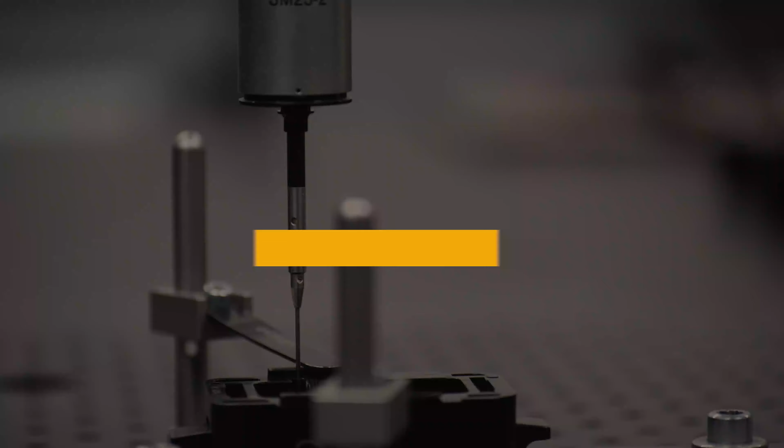We're taking our customers' drawings and designs and concepts, and we're building them into reality, into a production system that we deliver next door.

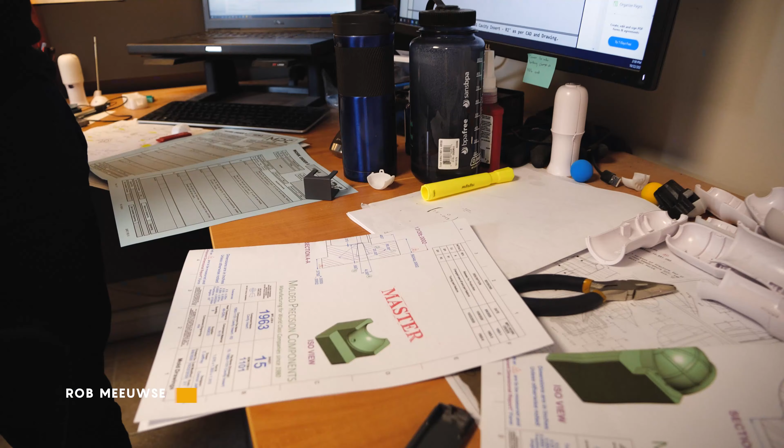Is there anything critical that you guys need or need to update on as far as timing goes?

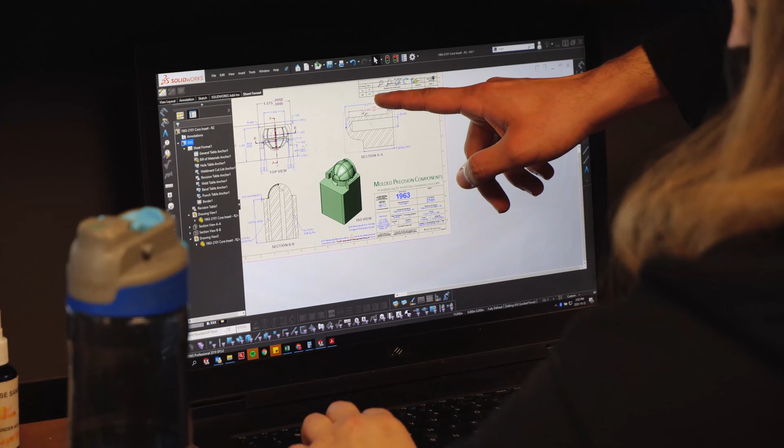Our program manager is Sam Cooney, who is responsible for being our main liaison between everyone at MPC and our customer. They take care of managing the timelines, all the money in and out for what happens with the program. Our current project engineers are Kasai Hassoun and Shane Comella. They're responsible for dealing with all technical things on the project. They're the ones who have to take true ownership of it, every aspect: the design of the tool, the tuning of the parts, making sure that we hit our dates on our timeline.

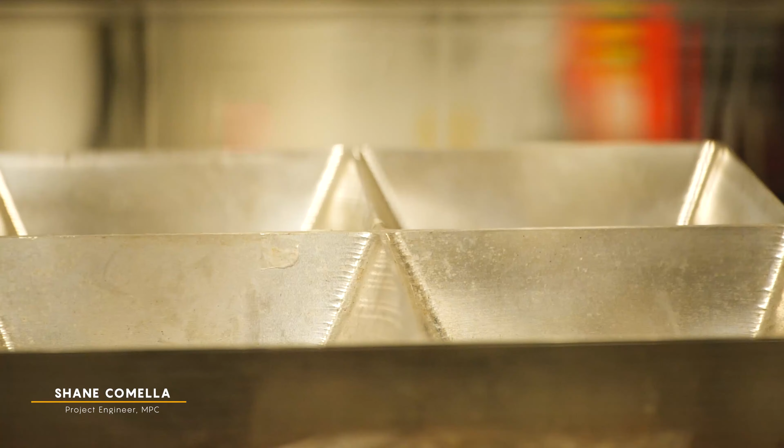I spend so much time looking at paper prints of the part or the 3D CAD model, but there's just something about seeing the plastic go in and the mold open and then seeing this physical part in your hand. It's really exciting. It makes me feel like a giant kid.

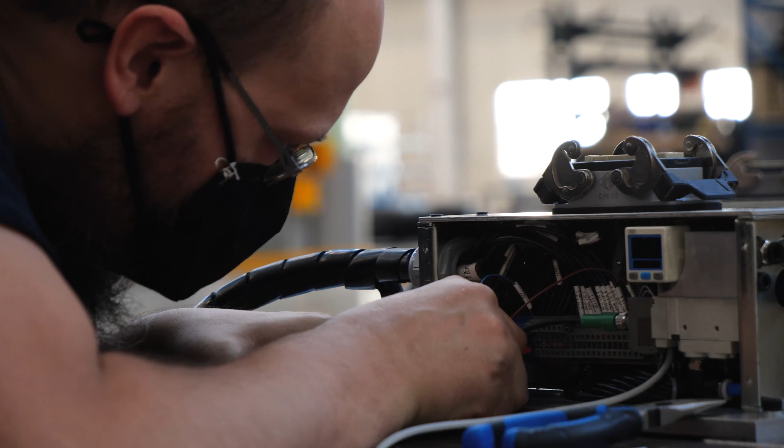Our CAD designers are Devin Johnson and Connor Jeffrey, who design tools. They help out with part changes with our customers, and they can design just about anything. I want to give a shout out to the tool shop for dealing with all my bad designs and telling me the way I should design it, I guess.

Well, welcome to my kingdom. It's my CMM room right here. So I have everything, all my weapons are in here.

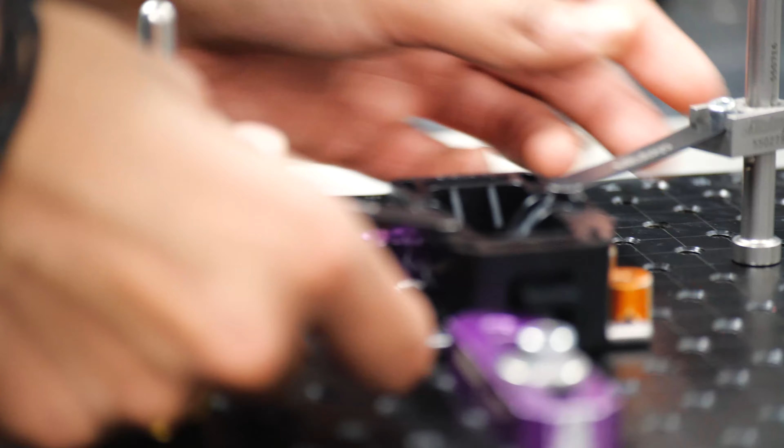Our metrologist is AJ, who is in charge of taking all those first off tool parts and measuring them to get all the data that we have. It's a very extensive job because there's a lot of measurement that we do.

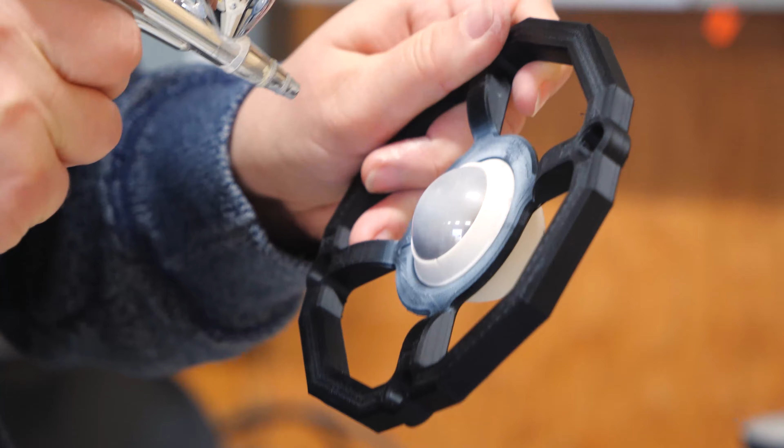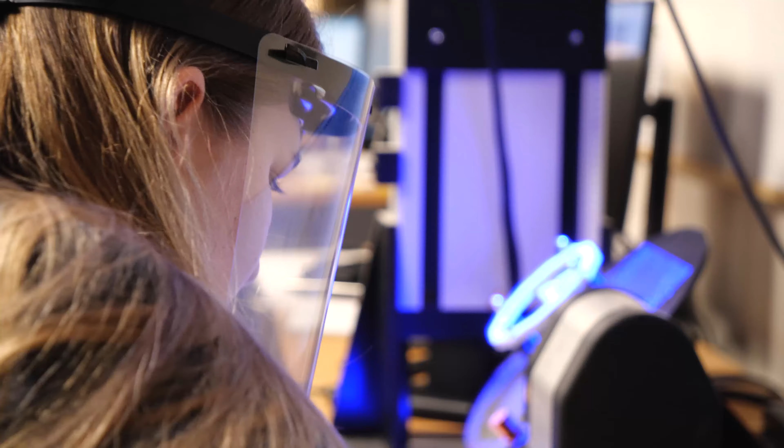Our support engineer, Trish, is a very valuable person to have on the team. She's versatile in what she can do. Often enough in engineering you end up with something that is a bottleneck, and they're there to help with just about everything. I like here that I'm treated as a team member as opposed to just like someone everyone's constantly opening doors for, not wanting to make a stupid joke because there's a girl in the room or something. But no, everyone just treats me like one of the team, and that's really what I like most about it.

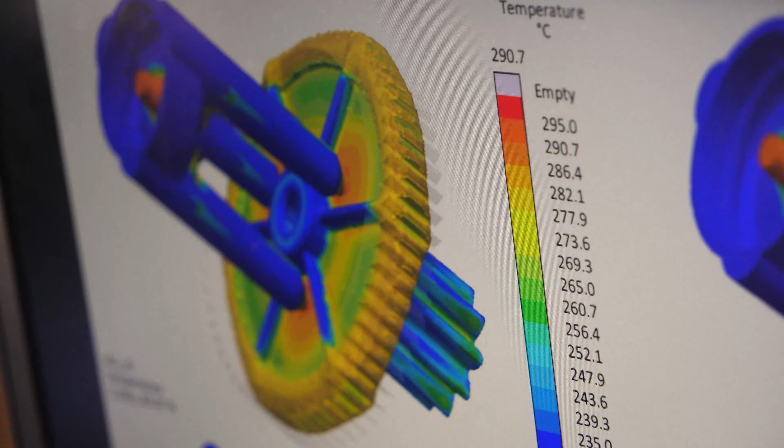Justin Morton is our research and development engineer. He has an incredibly important job here. He does a lot of our Moldflow, which is a very specialized engineering function. He not only operates that, but he's developing the system that will allow other people to use that tool. If you name it, if it's new and upcoming in engineering, Justin's job is to figure out how we can take advantage of that.

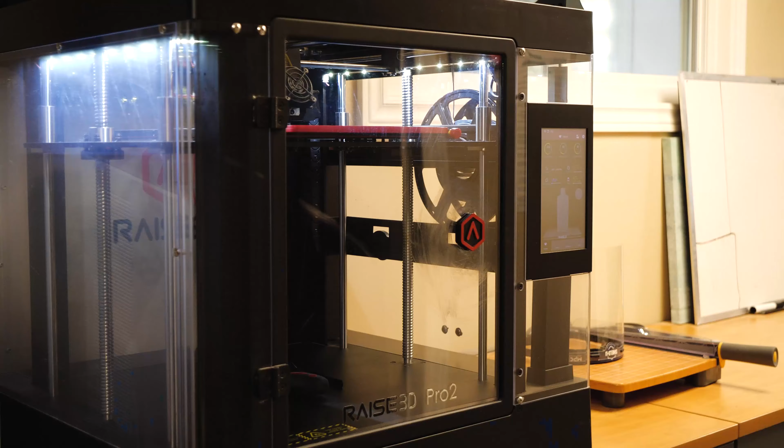To a certain extent, I don't really care what I'm doing. I just like to dive in deep to finding solutions to problems and pushing technology and optimizing to the highest level.

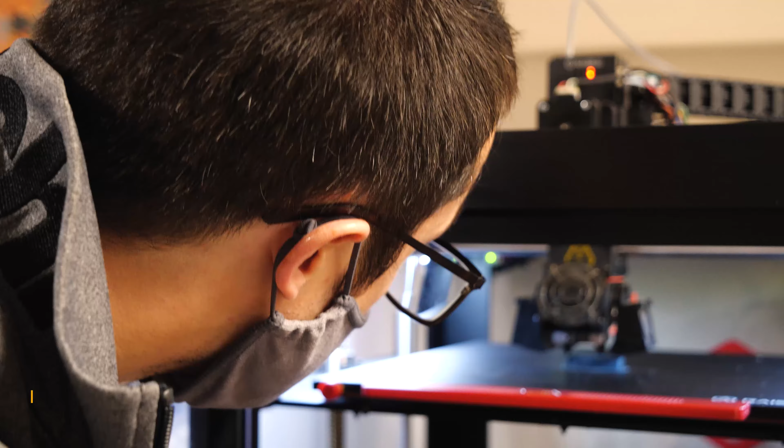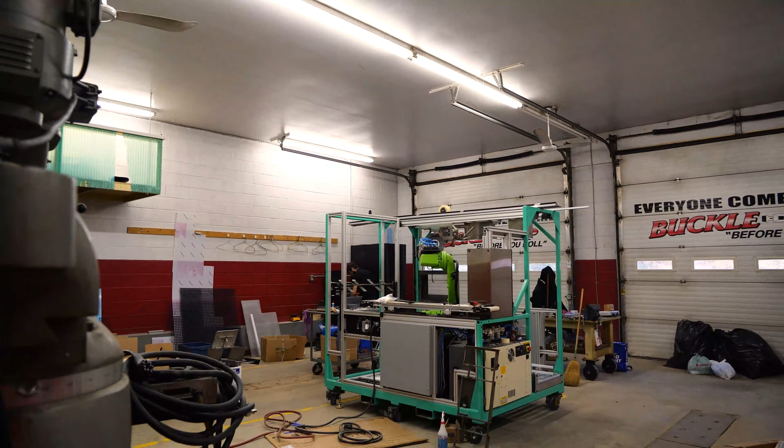Automation is the lazy engineer's way of not doing things, because something in a machine will do it for you.

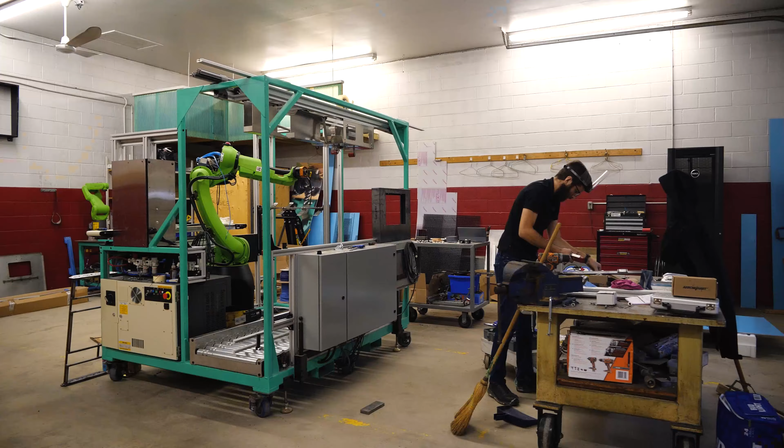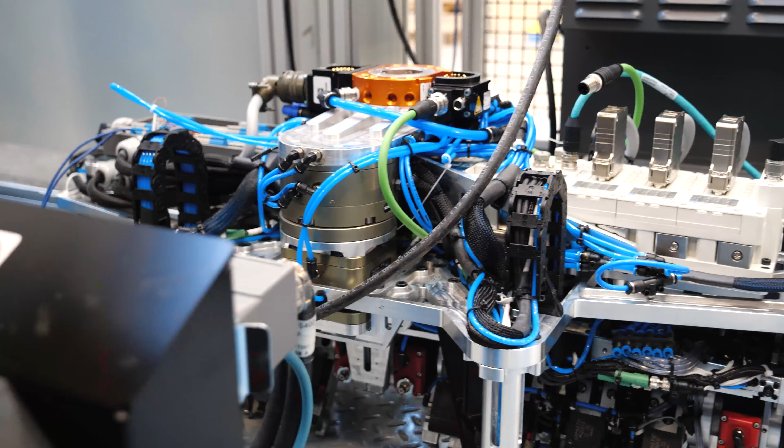Our automation team is Andrew Bronny, Kyle Morton, and Joseph McIntyre. They get to play with some of the coolest toys because they get the robots and all the fancy cameras to measure parts in process. If you could see the end of arm that Joseph created, I think everyone in the company can't wait to see that on a machine running. Who doesn't want to come in and play with robots every day, right?

There was an end of arm that I know Justin really wanted to see, but he wasn't here that day. I think three different people sent him videos of it working, because I know you put all your effort into this and you just want to see it work. So with a team like this, everybody's got your back. Everybody's trying to make sure that it's like, yeah, look at what you did. That's awesome, and that's good stuff.

Currently, we have one co-op. It's Scott Bowman. His main role here is to aid Sam in the program management side of things.

You would say it's awesome. I would say it's like awesome, somewhere between close to awesome, but sometimes he's just a little bit too energetic, with footballs in your face, stuff flying everywhere. But I'm lying, it's awesome. We used to use a Yoda hat as our target for our Nerf guns, and every time we dropped it, that's where we know who the winner is. And there used to be gifts as well.

I count myself very fortunate to be able to work alongside my brother. It's something that I've always wanted to be able to do at some point. He's worked on and worked through, and to see him in a professional environment is very, really cool. Honestly, so grateful to be able to work with that guy. We've always had a pretty strong relationship as brothers, which I've always been grateful for, and it's been really neat just being able to bring that into the work environment.